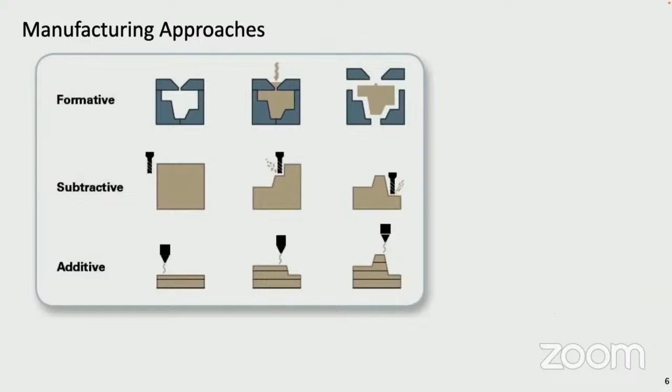We heard a bit of an introduction last night from Chad about making things, and I thought I'd put it into context regarding the 3 different ways of really making things: molding, which are formative techniques that we've been active in over the years - I'll touch on that. A lot of people make things by subtractive techniques, and then additive. I think the value of doing things by additive manufacturing is mostly related to making things at scale that cannot be made by molding.

The complexity of lattices, for example - lattices are an integral part of manufacturing buildings and bridges, but every strut of a bridge is an individual part, and to do that as one component is impossible from a manufacturing point of view. So additive really thrives in that regard. And just to say something very simple but exceedingly profound: product design depends on product manufacturing.

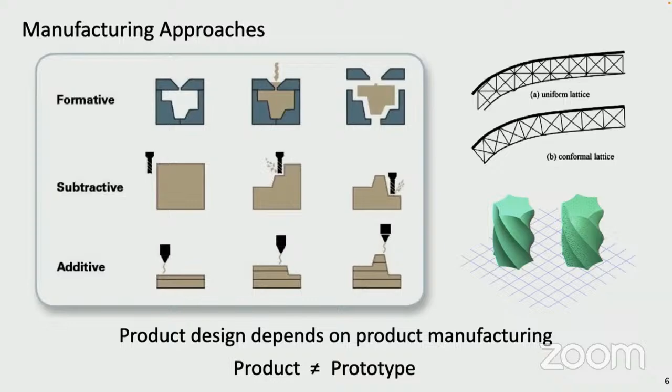You don't see things that can't be made. You do research, there's a lot of academic research, you see lots of beautiful things, but translating that into the market requires it to be makeable. This difference between a product and prototyping is really important to keep in mind. What I'm going to try to emphasize is manufacturing science and engineering, the tools that can actually scale to bring things forward, as opposed to the beautiful tools for prototyping and basic science research.

I stole a slide from Matt Becker, his perspective on polymer-based additive manufacturing, with various techniques including the extrusion techniques we see a lot of. Think about a hot melt glue gun and other extrusion kinds of approaches for deposition. Then you have jetting, binder jetting approaches with UV curing and powders, and powder sintering, which comes out of the metal-based 3D printing world. Metals being atomic solids sinter very differently than molecular solids. Polymers derive all their properties from chain entanglements, and the full evolution of chain entanglements often doesn't happen by sintering, but it's a profound technology nonetheless.

What I'm going to be talking about is the liquid-based UV curing systems, and there's been a history of those. Basically a direct write tool in a layer-by-layer approach, turning a liquid into a solid. That was the SLA technologies developed in the 1980s in Japan and then further in the United States. Then going from direct write to an XY projection, a DLP system, digital light projection systems, which dramatically improve the speed because now you're projecting an entire XY plane instead of direct write.

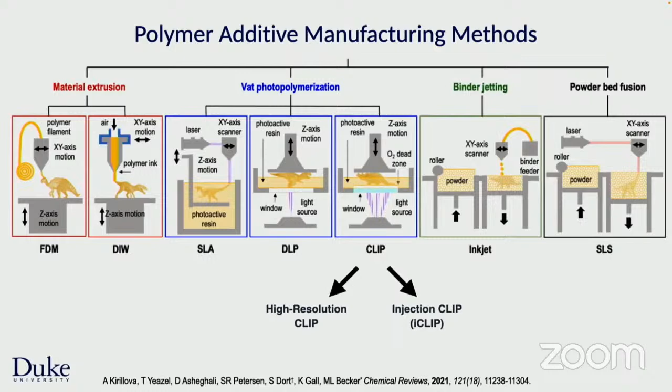About 7 years ago now, we published this paper and gave a talk at TED about a new approach for 3D printing that we refer to as continuous liquid interface production. It's basically an XY projection from a DLP projector, and we're using light at 385 nanometers. At the bottom of this reservoir is a very special window. It's not only optically transparent, but it's also permeable to oxygen.

Those of you familiar with free radical polymerization know oxygen's an inhibitor for free radical polymerizations. When you hear about polymerizing a monomer, you often degas the monomer - you're removing the oxygen so that you can kick off the polymerization. Here, we're exploiting oxygen, and we're exploiting the inhibition of the polymerization and the replenishment of oxygen caused by the depletion of oxygen with the light-induced decomposition of the photoinitiator. I'll walk through that in more detail.

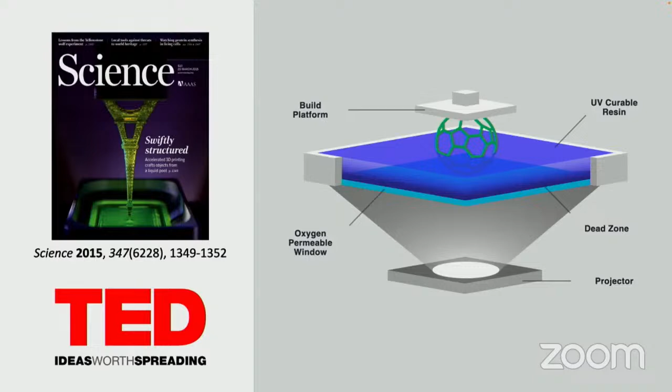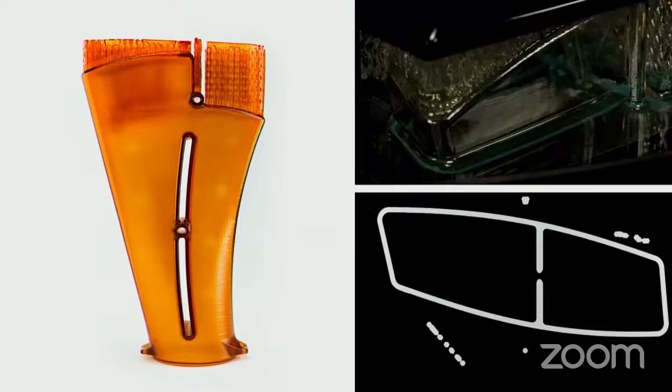What happens is you lower this platform into this liquid reservoir, you get very close to the window, let's say you get close to about 100 microns. So you have a 100 micron sandwich of UV curable resin between this stage and the window, and then you start projecting light. What happens is that light will permeate that 100 micron gap and cure the resin asymmetrically. The resin will bond to this metal platform, adhesively bond to it, but it doesn't bond to the window because of the oxygen replenishment, and there's a gap between the part and the window.

As you pull the part up, there's a suction force that draws resin in underneath it. As this platform moves - and this is an accelerated video, but this is 100 to 1,000 times faster than traditional 3D printing running in this manner - and because we're using this projection of light, we can basically make unmoldable things. This breakthrough in speed allowed 3D printing to transition significantly to a manufacturing setting.

Now, what kind of window gives you these properties? We looked at a lot of different kinds of windows. We looked at thin films. We looked at rigid windows. We looked at liquid windows back in 2014 - Chad talked about some liquid windows, we were doing that in 2014 as well. The key is that they're highly permeable to oxygen, and perfluoropolyethers and perfluoropolymers are among the most oxygen-soluble or permeable materials known.

We like rigid windows because there's a lot of forces on the growing part, and I'll walk you through those. There's a Stefan adhesion force between a solid and a window that's caused by the liquid. And so we actually like mechanically strong and durable windows to make this work well.

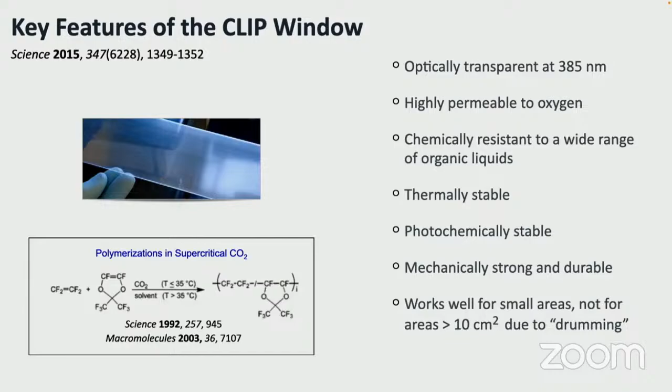So I'm going to show you something here. This is optical coherence tomography, kind of like ultrasound imaging, but uses light instead of sound waves. And you'll see the part growing. We put some particles in there as a contrast agent. But you can see this gap. This is a gap created by the oxygen. Light's coming through here, curing the resin, and you see as you lift the part up, resin's being drawn in underneath here.

This is not an adhesion issue. There's a mistake in the literature when people think about this as adhesion. This is a mass transfer issue. How do you get resin in to the deepest pixel? And that's the key to these processes. Oxygen gives you the ability to replenish liquid without going through a traditional layer-by-layer approach. So this is really a mass transfer issue.

So what's happening is, if you look at what happens, light comes in. This is a UV resin, a UV curable resin with a photoinitiator. Light comes in, it decomposes the photoinitiator, generates a radical pair. That radical pair can do one of two things. If there's oxygen present, the reaction with oxygen is far greater than it is for kicking off a polymerization. So there's a competition reaction between inhibition with oxygen and initiation of polymerization.

When light comes in, this is a concentration axis, general terminology, and this is a z-axis, so we're going from the window up into the liquid. Light's coming through the window. It's most intense as it enters the vat, and then the light intensity depletes with distance up into the liquid, just due to molar absorptivity.

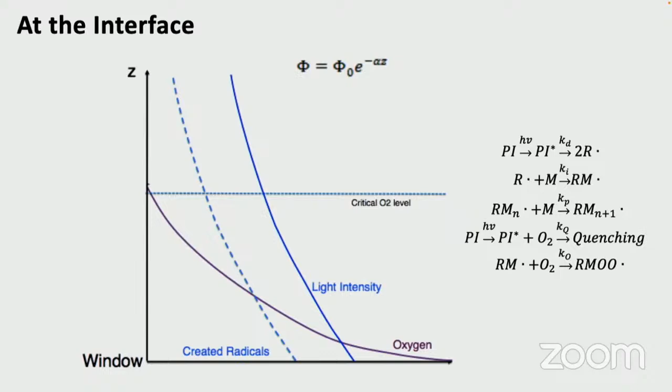That light is decomposing the photoinitiator, which generates a radical pair, so the radical concentration is highest at the window, but so is the oxygen concentration. And as that oxygen concentration gets depleted because the radicals react with oxygen, the oxygen is being replenished through the window because the window is very permeable, and underneath the window is a source of oxygen. So what happens is the oxygen concentration is dropping with time, with distance, and once it drops below a certain threshold, the polymerization will take off.

And this distance is the dead zone. That's where the rate of polymerization will take off. There's a gel effect, even a Trommsdorff effect, back to Smith-Ewart kinetics. And this distance is what we monitor.

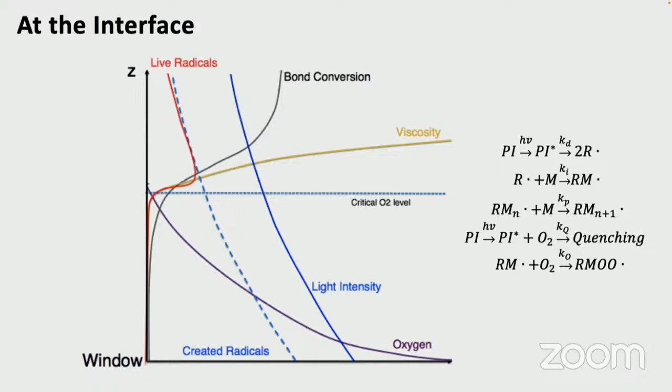There's a lot happening. There's heat evolution, oxygen consumption, viscosity issues play a really key role. There's a lot of forces on the part, so the green strength of the part as you're pulling on it, and this is just a simple geometry. I'm showing you just a cylinder, but imagine if you're making a complex lattice and the part is elastic. You can deform it and screw it up.

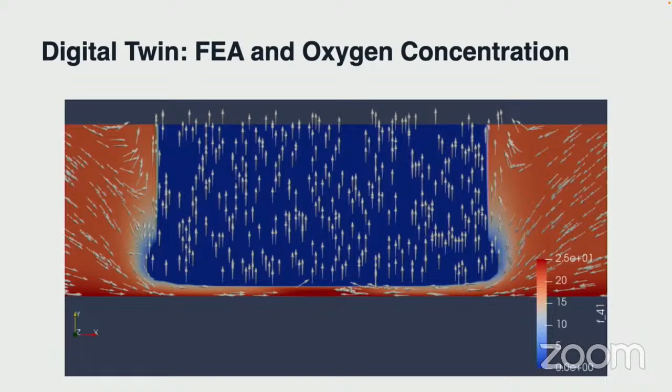So there's a lot, this is a complicated process. I think of this as a software-controlled chemical reaction to grow the parts, because we have to bring a lot of understanding to the process to even get it to work. And so we have this flow field driven underneath the forming part. There is a gradient of polymerization between the low viscosity monomer and the part, and there's a velocity flow field, and we control every step of the process.

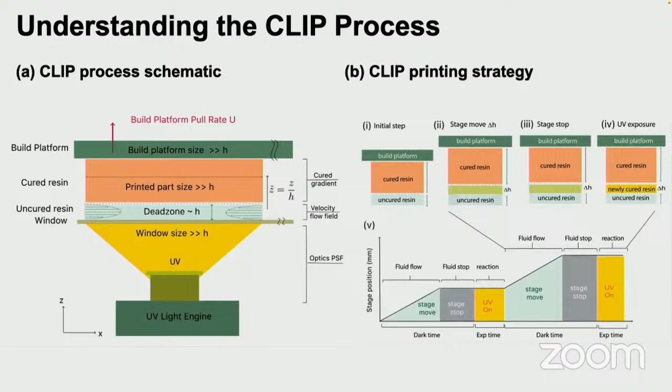The printer is designed with the principles of mechatronics, where everything is sensored up, motorized, and completely controllable. So when we elevate the stage, we can elevate it at whatever rates we want. We can pause, wait for the liquid to reach quiescence. We can photolyze an image, and then we can repeat the process. And this can happen very quickly, and we're basically playing a movie frame by frame, okay?

So we rolled this out into a company. It was a fun run leading the company.

The first person I hired, our founding VP of engineering, happened to be the founding VP of engineering at Tesla. We had over 50 former Tesla employees in the company. And we sensored up the printers, and we connected them to the internet. The reason is, in the beginning, this was hard to get to work, and our fundamental understanding, the digital twin of our process, if you will, was modest. We could screw up any print. But what happened was we could do over-the-air software upgrades. These printers were connected to the internet. We controlled the oxygen, the light, and everything.

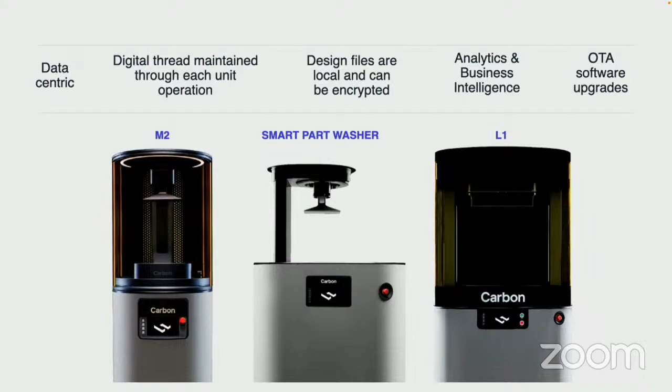And as more people used the printer, the better the printers got. That's a network effect, and it turned out to be an amazing way to roll out the business.

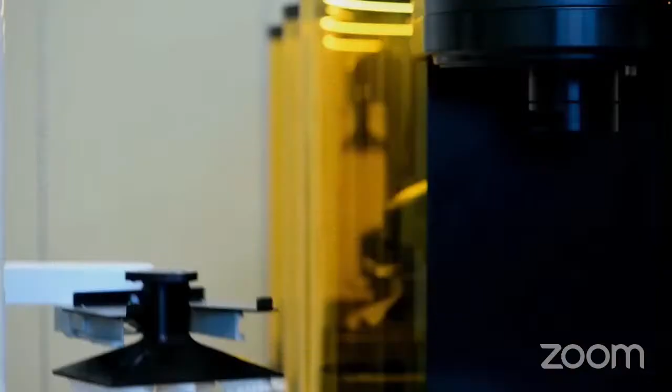We started stringing together the printers, and again, with everything connected, even the printer platform has got a near-field communication tag on it. So we're moving the platforms around these factories, and the software's tracking every element of it, so you knew which parts were on which platforms.

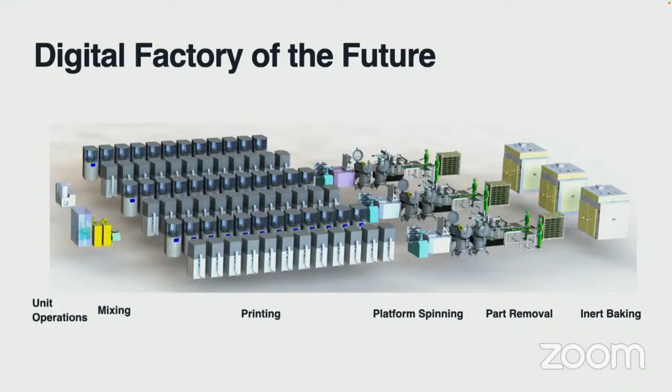We could print the parts. We can go into there's a part washer in this schematic. This is a part washer. These are parts being printed. And you can start putting together bigger and bigger factories, and even with bigger and bigger printers.

One of the things to recognize is when you start running up lots of these printers in a liquid resin, it's common to wash with solvent because there's a lot of excess resin on the parts, and you can't do that at scale. That's a waste nightmare - mixed waste, IPA, resin. So what we ended up doing is pioneering a spinning process.

And so you'll see a centrifuge designed in the Central Valley, California, like a lettuce spinner - a platform with a pair of running shoes with a lattice. These parts come out of the printer and they get spun. Excess resin gets collected at the bottom and goes back into the printer. So it's 100% atom efficient from this process.

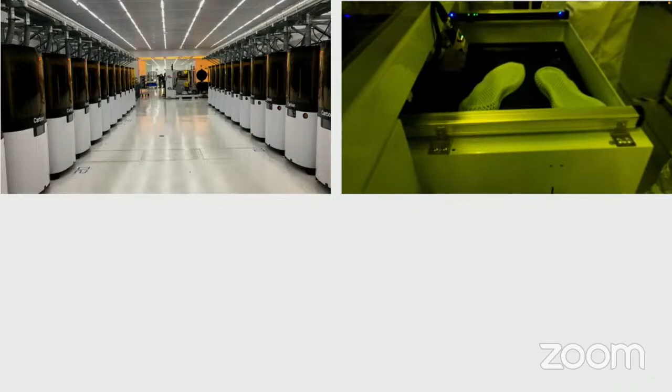And back to the digital world I'm talking about, these shoes are not only designed for performance and comfort and all those things, they're designed to be spun clean. That's what a digital co-design process looks like in the digital world, to optimize manufacturing and throughput. And then every part has got a digital code on it, a data matrix, and it's tracked throughout the factory.

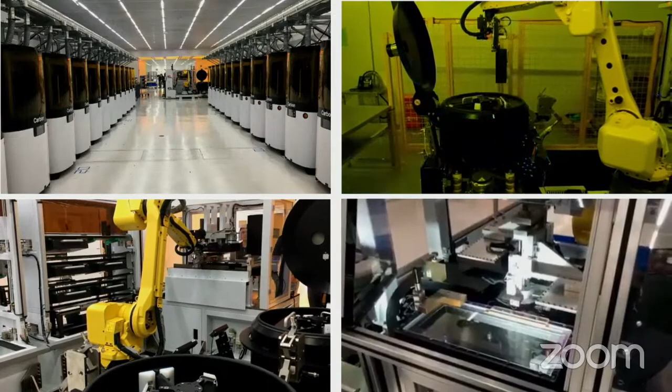So this opens up new business models. I think of every part as alive. Every part has a unique record in the cloud. We have its birth certificate. We know which printer, which resin. We know every photon that went into every layer, all documented. We have its grades in school - we have its mechanical properties. That stress strain curve gets put up into that file.

They go through use life. You can measure the properties again and populate it. You can get its death certificate and recycle. You can use this data to now quantify environmental stewardship. And this digital world opens up new business models. And this is where this is all going.

So let me pivot away from the process and talk about the resins. As a lot of you know that are in the polymer world, light is not a great way to make great polymers - they're often brittle plastics. And it doesn't matter if you got a really fast polymerization process, nobody wants lots of brittle plastic stuff. So, and I'm a polymer person, this was a key breakthrough we needed to focus on: how do you get a great set of polymer properties out of a light-based printing process?

We cheated. We broke it into two processes. Most great polymers are made by reactive resins - think about polyurethanes, polyureas, cyanate esters, epoxies. So we basically split the process into two, and we use orthogonal chemistry. You saw Carolyn Bertozzi just got the Nobel Prize for orthogonal biochemistry inside a cell. This is orthogonal chemistry in a 3D printer, right?

So we have free radical chemistry, a photoinitiator, and classic free radically polymerizable monomers - think about it as 10 to 15 volume% of a UV curable component. And then we have classic step growth polymerization components, shown here with an epoxy, a diepoxide and a diamine, with a certain pot life. We knew no one ever went into this approach because the printers were historically too slow, and these step growth chemistries would prematurely gel. We're printing 100 to 1,000 times faster. We knew we had a window of operability to combine both step growth and the UV curable systems.

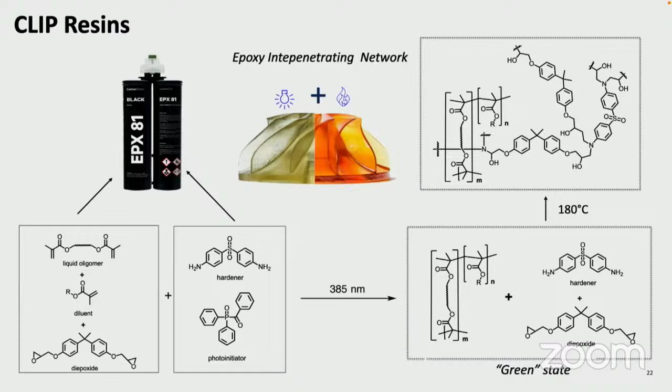And this is how this works. I showed you epoxies. I love polyurethanes. Your polyurethanes are really versatile. You can vary the soft segment, the rigid segment, the chain extender. You can get elastomers. You can get high molecular weight linear polymer that's got great ductility and impact strength. And we use these a lot in this approach.

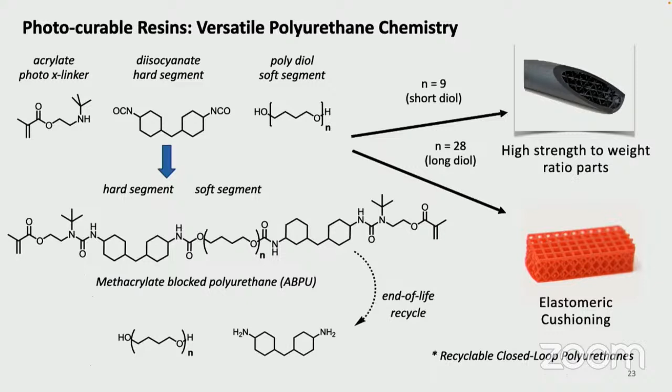In the beginning, as I mentioned, we pioneered this kind of chemistry, but we started to teach the chemical companies how to do this. And so we set up basically an app store for resins. Right now, there's over 50 different resins available. We designed about two-thirds of them and stood up a supply chain. But now the chemical companies are designing resins for this platform, and they sell them on our platform. They handle all the shipping and those details.

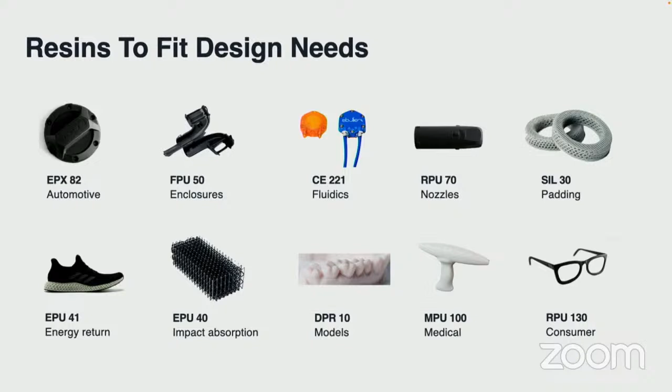It opens up new properties that we haven't gotten to yet, especially in the dental space. I'll walk through that. But we have master files at the FDA and all sorts of products with a wide range of different resins, and we're constantly developing new ones, including resins that are chemically degradable, can go back to liquids and be reused. So lots of stuff coming.

So this is now a platform approach, and it gives businesses the ability to make things. I've got a little video just to show you this.

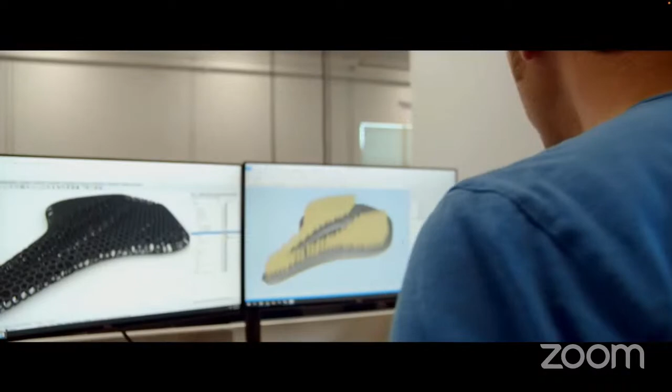We salute all those who believe good enough is never good or enough. Those who pursue excellence for themselves and for our planet. At Carbon, we apply our craft using science and technology to push limits and realize products unmatched in performance. Our difference is one you feel, and it is light years ahead of anything else out there. You feel it in running shoes that control energy with every stride. Saddles that enhance your performance and comfort mile after mile. Helmets that increase your protection every time you take the field. Clear aligners and dentures that improve oral health and give you more than a few reasons to smile. Crafted by Carbon is a promise. It stands for dedication and focus to crafting what you and our planet truly need. Ongoing creation of amazing answers to our toughest questions. We salute the leaders, dreamers, and doers who keep creation in motion, who boldly imagine a brighter future and craft it every day.

So this is an amazing business. No printer has been taken out of the field. They're all in a subscription business. They all consume lots of resins. They consume software too. And we started with, I always rank things in a hierarchy of regulatory hurdles. If you can design a running shoe and you know it works, you can scale it. Way different than the automotive industry or the healthcare industry. So we always stage things to get adoption and like that.

And these running shoes represent a unique moment in additive manufacturing. This is the highest volume 3D printed product in history. We went exclusively in the beginning with Adidas. Adidas makes 500 million pairs of shoes a year. We'll get to 10% of that. We're not there yet. But we know there are more 3D printed shoes made with Adidas than all that Under Armour sells in total, because Under Armour is not a real player relative to Nike and Adidas.

And we started moving, and we got the first 3D printed parts on new vehicles out of Detroit, on Ford Mustangs, F-150 trucks. We got parts on all sorts of electric vehicles around the world, all sorts of industrial components. And a big fraction of our business is in healthcare.

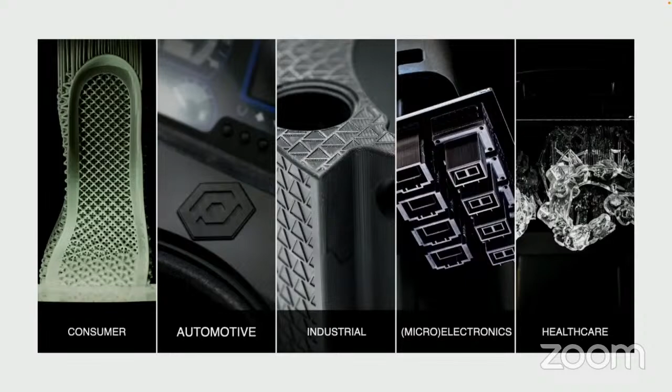Related to dental. But these products become, we think of things as a bowling alley. From a marketing tech perspective, what's the first bowling pin you're going to knock over? And then how does that cascade to additional products? These elastomer lattices, pioneered with Adidas, that are energy returning, you can make a version of it that's energy dissipative, which you want for football helmets. But the designs are similar, and some of the mechanics are similar. And so these are a wide range of products that are scaling in this manner.

But digital dentistry is an amazing field. It starts with things like Invisalign's product. Invisalign created a category. Their patents expired. They now only have about 50% of the category. We power about 70% of the others.

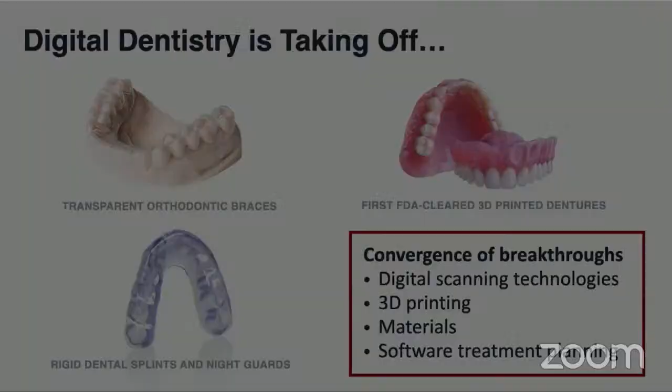But we also pioneered the world's first FDA-cleared 3D printed denture. There are 36 million Americans that have no teeth. There's over 100 million Americans that are missing a tooth. This is a huge upward mobility issue. It's hard to get a job if you don't have your teeth, speak properly, eat properly. This is significantly cheaper to go down this pathway, and it's enabled by intraoral scanning, digital, getting away from impressions. And we've got a video to show you what dentures are like.

For the last 45 years of delivering dentures or longer, there was always an unknown. When patients are looking for a denture, their biggest complaint is that they don't fit. You think of denture making as a craft, I need a craftsperson. And Carbon can do it.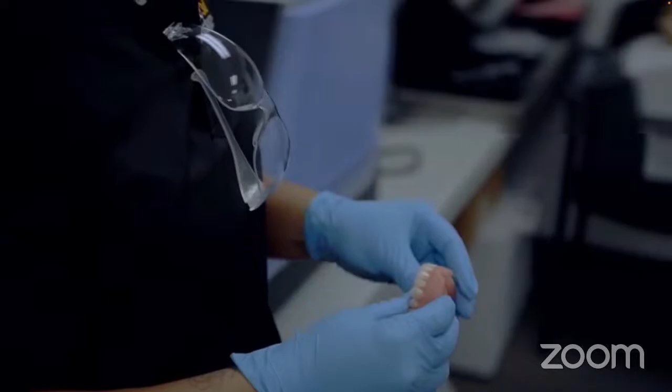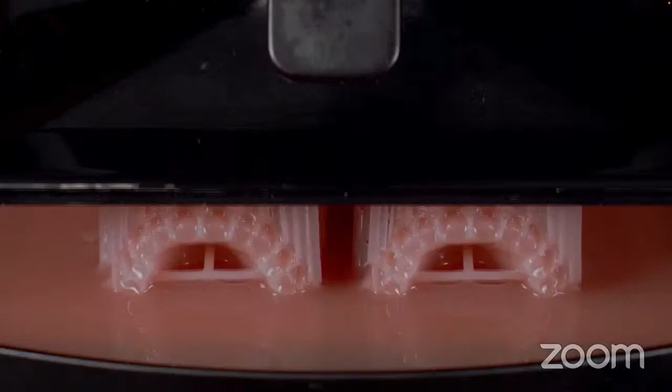Taking a lot and making it less is what a mill does. Taking nothing and making it something is what a printer does. We don't want to make molds, we don't want to make jigs, we want to make final products. And when you make final products from the milling process, it is far less economical than when you make final products from the printing process.

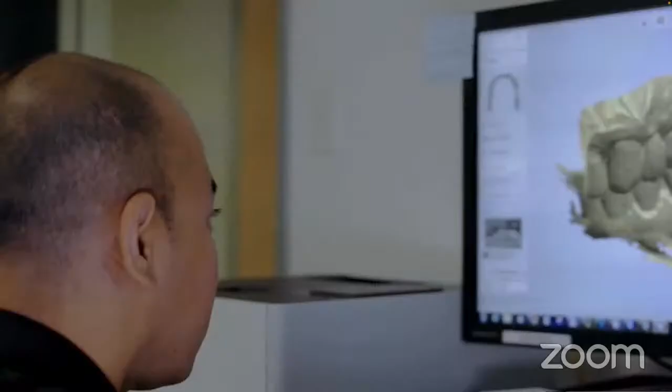There's three basic things: fit, comfort, and function. 3D printing brings all of those together. The accuracies and fit, comparably speaking to what was done even 5 years ago, has become so much higher in impact for patients and for clinicians across the country. For somebody that makes dentures day to day, it's transitional, it's transformative.

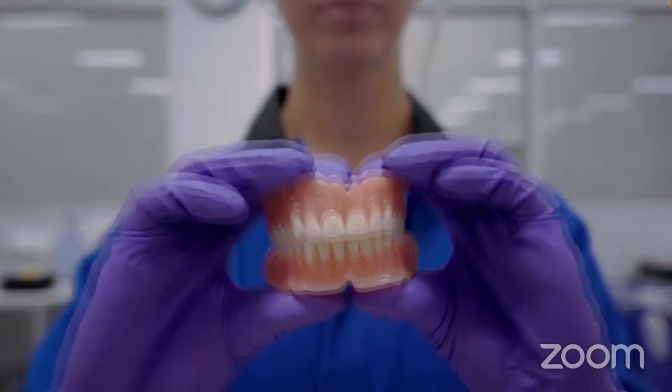A lab powered by carbon will allow me to make probably the best denture ever made. So of all the things we're doing, I'm most proud of that. And you go from 8 chairside visits for a manually prepared product to 2 chairside visits. And it's perfectly fitting because it's done with scanning.

If you lose your dentures, and I've heard so many horror stories, somebody wraps them up in a newspaper, throws them in a fireplace, dog gets them. You're back in that chair 8 more times to get another one, handcrafted. It's hard to hire handcrafting people to make them. Once you go digital, you could order a 4-pack. Doesn't matter, right? So it's transformative in that regard.

Okay, so that's history. When we look forward, what are the additional things that need to happen in this field? One, we still want the printers to go faster. We want to do multiple material printing. We want to go to high resolution. Lots of opportunities on resins that are electrically conductive, resins that are biodegradable, resins that are chemically recyclable, new kinds of properties, thermal conductivity. And then there's lots on the software side of things.

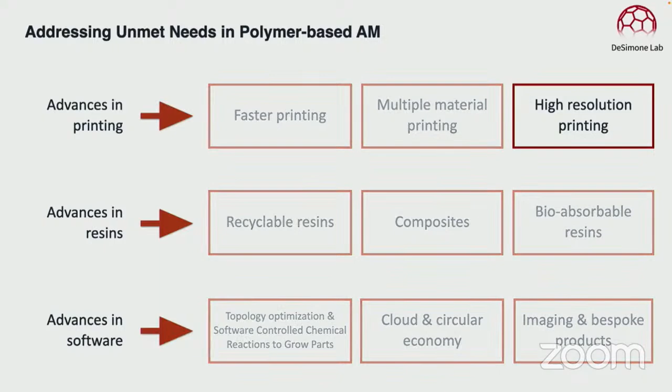We spend a lot of time on the OS, the operating system, but all sorts of scanning and design software too. Let me focus on high resolution for a second. Beautiful things happening at the small scale with direct write tools. You saw some of this in Chad's talk last night. Think about NanoScribe tools and everyone, amazing things.

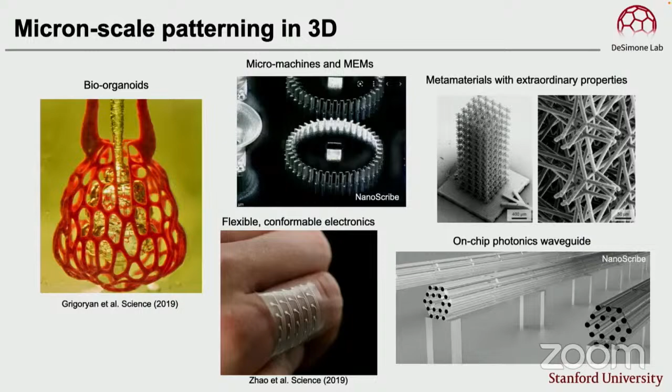You can't scale those up. They're research tools, and they have an important role in our ecosystem for doing that, but there's a lot of interest in how do you scale these things up. And so we set out to design a single-digit micron resolution printer.

So the printers I just showed you from Carbon, there's 2 classic sizes. There was a 75 micron pixel, it's the M-class printer. And there was the larger printer for the running shoes, it's a 162 micron. So we've built printers now down to 30 and now 1.5 micron resolution. And what that involved, what Kaiwen and Brian and Tim focused on, was the projection optics.

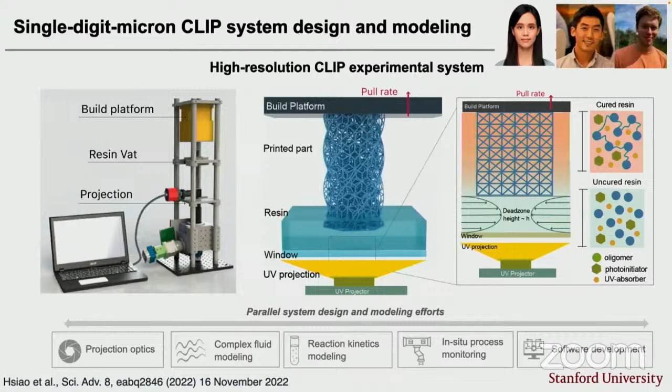Again, the fluid mechanics are very different at this length scale. The reaction kinetics, in situ process monitoring, and the software. And we like to print the Eiffel Tower. That's sort of a fun thing to do.

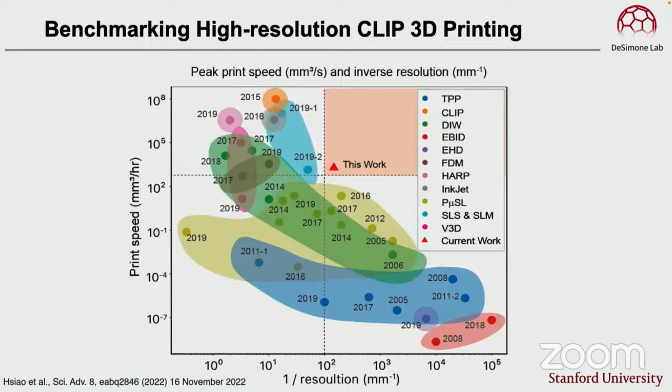The classic carbon printer, 75 micron, 30 micron resolution. We can start making these things. And then you see this little guy right there. This is done with a 1.5 micron XY projection. And you know, when you start putting this together and back to manufacturing, science, and engineering, you think about resolution and speed. Here's a lot of your direct write tools down here that drive a lot of the research industry. We want to start going into this box and have high throughput, high resolution. And that's where we're spending our time.

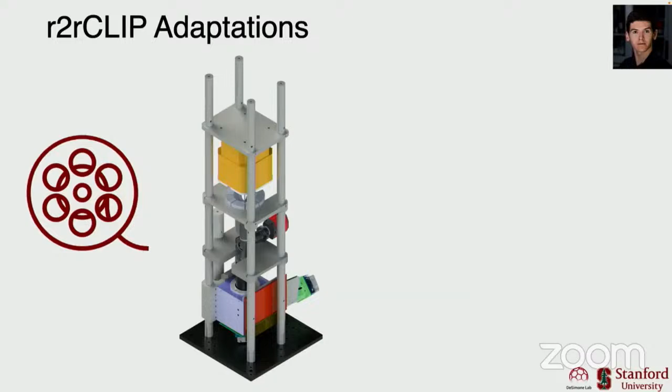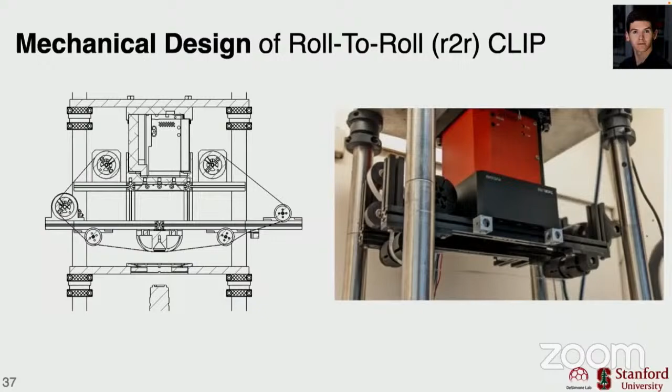Well, what are some of the things that we can do with this printer? Ali and others know, and Samir Mitragotri, we used to make particles by molding. I love particles. Now we're 3D printing particles. And when you have particles, you always have to think of a web-based process. You need the throughput. And so we have film that comes through the printer, the high-resolution printer, because it doesn't take long to print these. They're not very big. But you want to make a lot of them, so you've got to get the film going.

And these are some of our particles. This is actually looking at our particles in Heinrich Jaeger's lab at University of Chicago. He traps our particles in a sound node, so we can inspect them individually. But these are really interesting objects.

I used to mold particles. We call that particle replication in non-wetting templates, PRINT. And I talked a big game, but at the end of the day, looking back, I think we had 10 different shapes, because it was hard to get the master template, and you invested a lot in that. And because of the symmetry challenges with molding, we had modestly interesting shapes.

Where else are we interested in these? A lot of beautiful work coming out of here in microneedles. A lot of the world's chasing intradermal delivery. Why isn't intradermal delivery a thing? Well, it's been a challenge making it a reliable and repeatable dosage form.

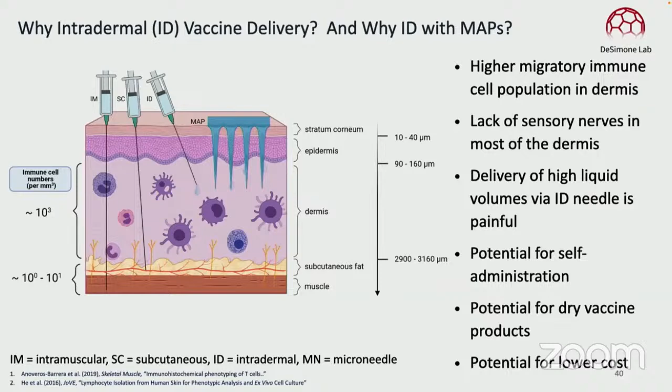In perspective, I think the evolution of the microneedle world started back in the 70s, and a lot of the technologies were etching silicon and some of the microfabrication techniques out of the microelectronics industry. Arguably, you can call that Gen 1 technology.

And then there was the molding approach. Start with a master template etched in silicon, make a mold, replicate those features with reasonable fidelity in the replication process, but that opened up the material space. But you're still limited with typically features that are all the same height, because that's what you get out of the microelectronics industry, and you have a bed of nails effect with challenges in the higher forces.

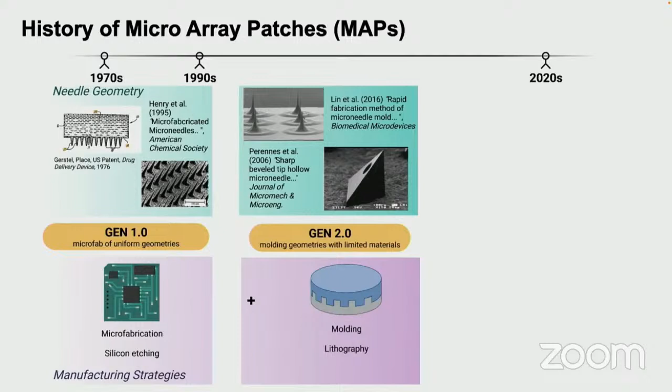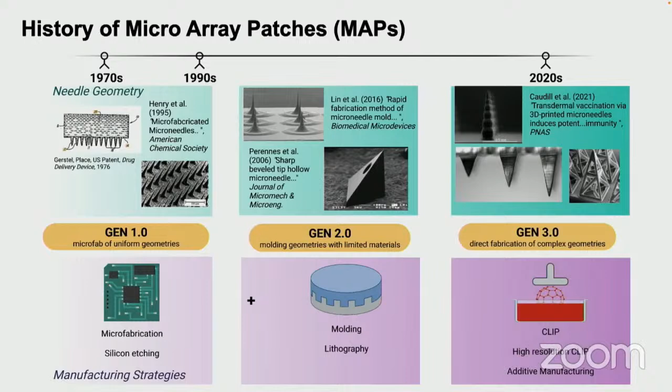You still have limited designs, and I would argue that we're now into a Gen 3 microneedle world that allows you to go to designs at scale, not just prototyping, but now at scale with designs, even simple designs of different heights, different structures that you can directly print.

So we've been at this now for a while, and finally got to the vaccine world when I moved to Stanford. But we started off with these very simple designs, arguably designs that could be molded, simple designs, maybe a little bit more surface area. This is a printer with 30 micron resolution.

And we did a free meniscus coating, dip coating of a model vaccine component, antigen and adjuvant. We separated them on different needles. And then we did a skin delivery system.

And we compared that to intramuscular injection, like a lot of people are doing. We showed that because we're taking advantage of a higher concentration of migratory immune cells in the skin, we saw a 50-fold increase in antibody response compared to an intramuscular injection. We had a different Th1, Th2 balance, T-cell, B-cell response. I won't get into those details here, but we showed that this is a valuable approach for an enhanced vaccine delivery system.

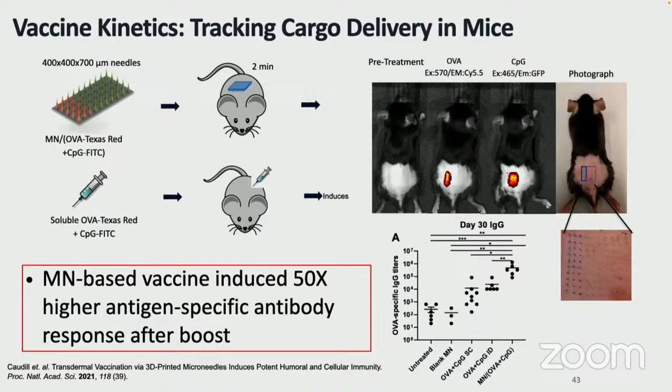The challenge is when you have a coating on a solid microneedle, especially coatings that might not be mechanically very strong. Think about a brittle sugar coating from a lyophilized-like product—the analogy I use with the group is a 2-day-old glazed donut. The sugar falls off. If that sugar is on the cone and you're pushing into the skin, it can slough off as you're inserting it, leading to lack of reproducibility and reliability.

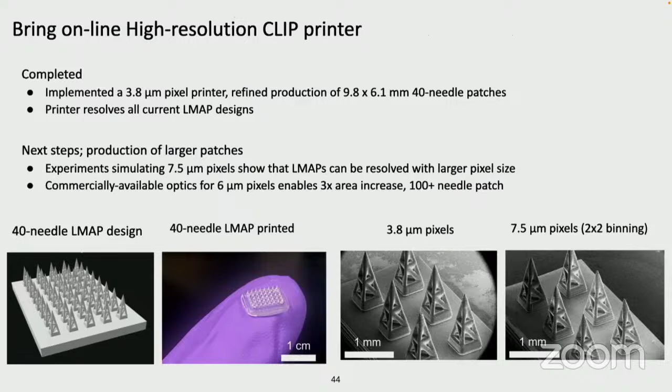So now with a higher resolution printer, we can advance these designs to ones that arguably haven't been seen before, taking advantage of a mesoscale structure within the needles. With a 3.8 micron pixel, and doubling the pixel size, we found what was an optimal size for us, and we've been making a lot of different designs. Now we have the value of a light-based process where the innovation engine is ramped up, because kids can design something in the morning and print it out in the afternoon—it just opens up the design space.

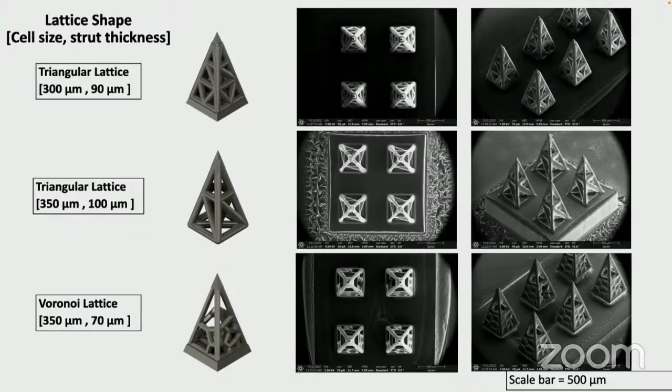We're really interested in having this innovation capability to make microneedles a reliable and repeatable dosage form. Now what's cool about these lattices is they're really great at trapping droplets of liquid through interfacial tension. You can control the surface energy of the lattice to trap a drop of liquid, and then deliver that liquid to the skin.

So we've been taking the Moderna and Pfizer vaccines and doing a local delivery without changing the formulation at all—just a different delivery mechanism.

But we also like to lyophilize the products. Lyophilized products in a dry state—lipid nanoparticle mRNA vaccines at room temperature in solid form—have been shown in the literature, not by us but in the literature, to be room temperature stable for 3 months and 6 months stable at 4 degrees. So it can dramatically change the supply chain.

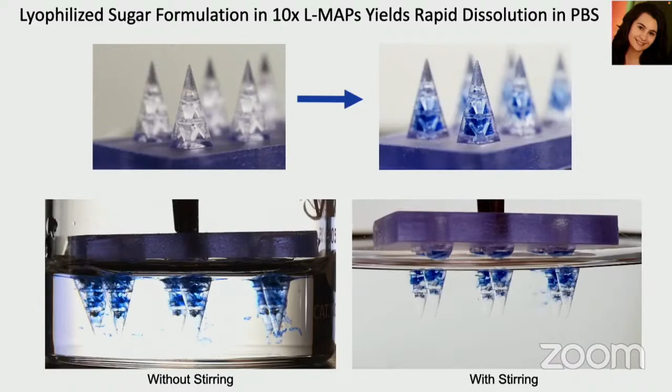The idea is that you could have a dry product inserted into the skin and have your own interstitial fluid reconstitute the product. That's the goal—to be able to ship dry products that are more shelf stable for the vaccine world.

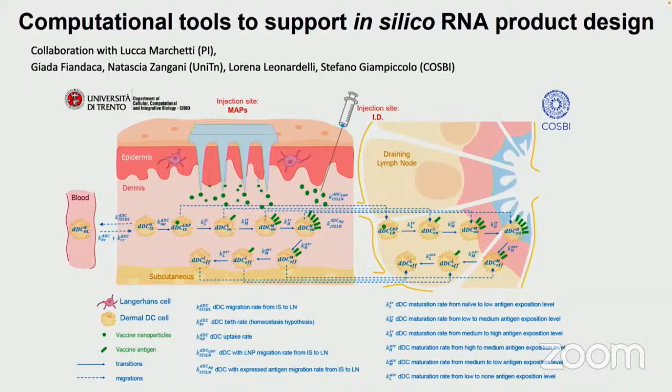Well why is that? It looks like we're delivering the same dose, but spreading it out over a larger area. There's some really interesting vaccine kinetics we're looking into—think about, do you want to give 2 immune cells 100 nanoparticles, or do you want to give 50 immune cells 2 nanoparticles? Because you can saturate out the protein expression. And it looks like we're in this regime where we're starting to quantify better performance, even over intradermal injection.

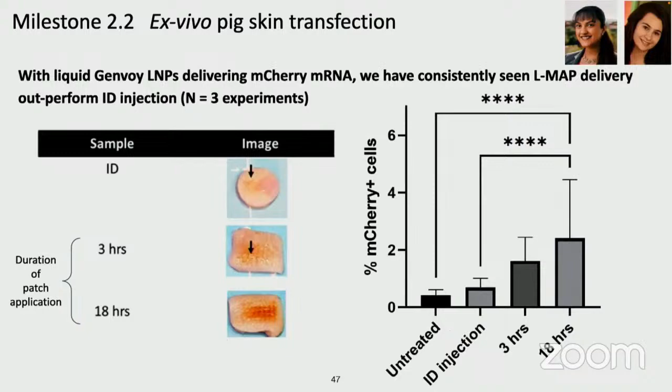Because we're giving access to these migratory immune cells. So we're going from excised pig skin, then the team traveled to Iowa, and we inoculated 70 different pigs, and we're ramping up—so the story is being told.

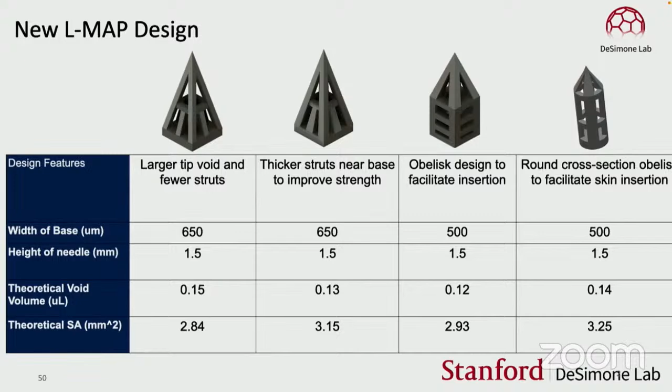And we got all sorts of new designs. We're looking at different ways of delivering and different components, and we're trying to establish a nomenclature. I'm not sure where we're at yet, but this is where we're going.

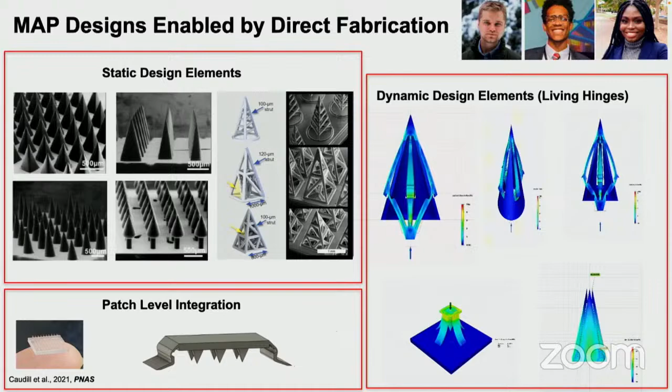We can also bring in advanced materials with capabilities of deformation, like a living hinge. So we've got all sorts of new products coming out, new designs, where we have moving parts in the microneedle world. So stay tuned for this. Again, these are things you can't imagine if you didn't have this capability for making things. Hold that thought, I'm going to come back to that.

Let me tell you about a new type of 3D printing we call injection CLIP. So CLIP, as everything I told you about, is a mass transfer limited process—you've got to get liquid into the gap. It's not a reaction rate limited process. There's no heat dissipation challenges. This is still a mass transfer limited process in all the SLA technologies.

So how do we get this closer to a reaction rate limited process? Well, we've got to get more resin into the gap. We're limited by resin coming in underneath that part, all coming from the periphery of the part. Well, what if...

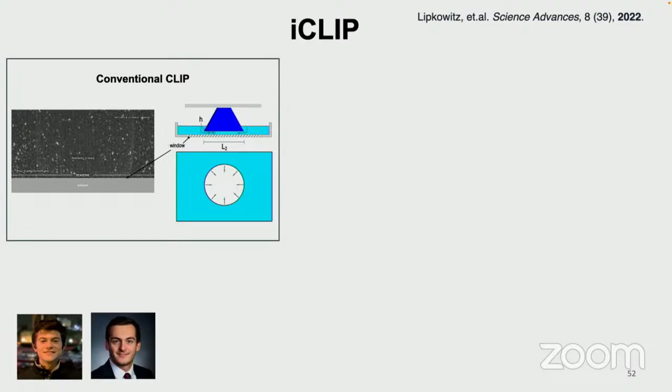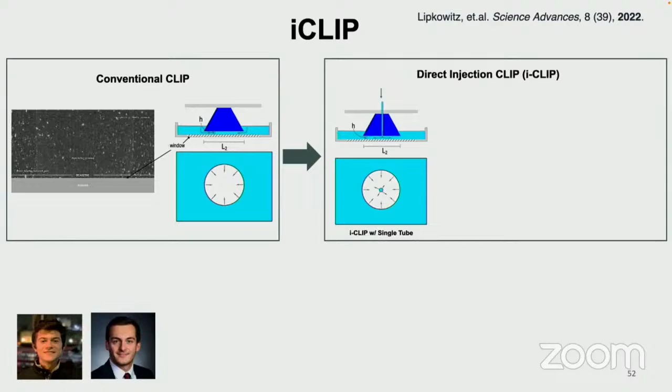...we were able to mechanically inject resin into the gap, not using suction forces, but now have a dynamically created microfluidic channel in a part that was fluidically connected to a port in the platform with mechanical injection of resin. Now you can blow resin into that gap as fast as you want. And you can imagine the design software for what the channels could look like.

And you can also imagine multiple resins. We call this injection CLIP. This should get us another order of magnitude or more in enhanced speed. It should open up higher viscosity resins, composites, and multi-material printing.

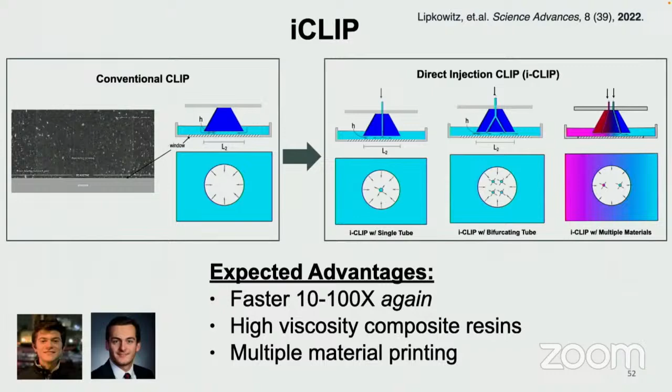We just published on this, working with Eric Shaqfeh to understand all the details in the fluid mechanics. What's fun is you can basically toggle a gradient between CLIP and injection CLIP. Imagine building a part where you fed 20% of the resin via the channel and 80% was drawn in from the periphery, or you fed all the resin via the channel. So you can run this process.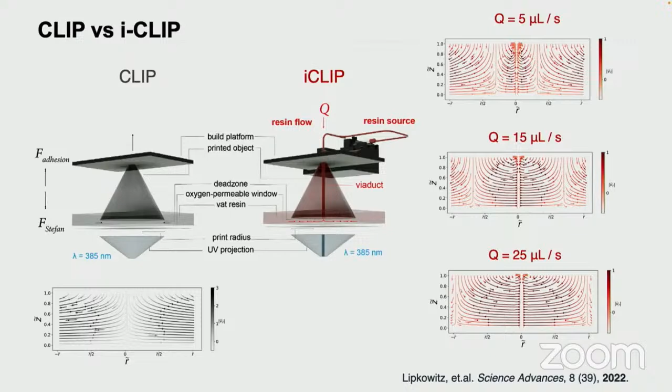Here's an example where all the resin needed for the part is coming through that central port. And here is where we're delivering just a fraction of the resin through the central port, with some coming from the periphery. You get a stagnation zone underneath the part, which has some really beautiful fluid mechanics at the interface, and you can toggle through that.

But the most important thing about this process is the Stefan adhesion force. If you have two plates of glass with a drop of water between them, it's hard to pull the glass apart, but easy to slide them. We're basically pulling in the Z direction two solid surfaces with liquid between them. That's what draws the liquid in.

There's a lot of force on the part, so much so that you have to balance it with the simple work of adhesion of the part glued to the platform. If the adhesion between the part and the window caused by that liquid gap exceeds the work of adhesion in that area, the part can fall off the platform - a failure mode. Depending on the width of the part, that adhesion force is higher.

So here's where the diameter is very high. You pull the platform up - we put a load cell on the platform to measure the forces. You pull the platform up, you stop, and you wait for the liquid to fill into the gap, and there's a stress relaxation that takes place. Depending on the diameter of the part, as the diameter goes down, the forces are lower.

But look what happens with injection CLIP - those forces can go away. In fact, you can get a negative force. This is like walking up to a wall with a fire hose - you're getting pushed back the other way. And so the forces go away.

Well, why does that matter? In 3D printing, it's often needed to put supports on parts to hold the part onto the platform, right? Now you can do things where you don't need those supports. Now, if you have islands, you'll still need a support, depending on the design.

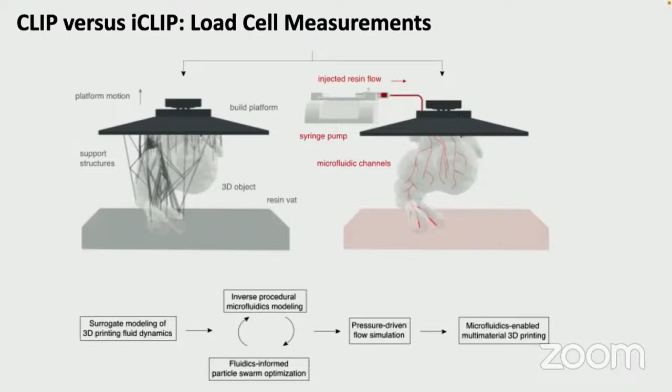And you can imagine that channels can get increasingly interesting, and you can start feeding multiple resins. We started working on this before the war broke out in Russia and Ukraine. We chose iconic buildings and wanted to keep with 3 colors - it's the same resin, just different colors. I'm from Philly, so you're always going to see something from Philly, whether it's Rocky Balboa or Independence Hall.

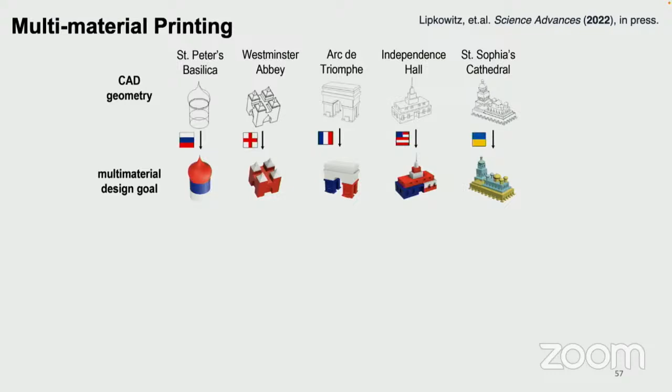Paris, London, and St. Peter's Basilica. And when the war broke out, we added St. Sophia's Cathedral, but it changed our color scheme. Nonetheless, it was easy to do. We built out the schematics for doing multi-material printing, and now we're feeding different resins using this approach. I love this image, okay.

But let me tell you what I think the killer app here is. I always think about what are the killer apps. The killer app here is actually the channel itself.

One of the biggest problems with SLA 3D printing is something called overcuring. I talked a lot about controlling the pixel size, but that was in the XY plane. The problem is the light - if you print this gap and go to print the next layer, the light never stays only in the layer you want. That's where you load it up with dye to try to make it opaque, which means you have to put more light in. It becomes all sorts of problems.

But making negative spaces in light-based 3D printing is an intrinsic challenge because of light, because there's resin here. It gets stuck in there and you overcure it. It accumulates light and will cure over time. And it's not just simple penetration, but there's light scattering coming into this space. There's light piping happening, depending on the design. It's complicated.

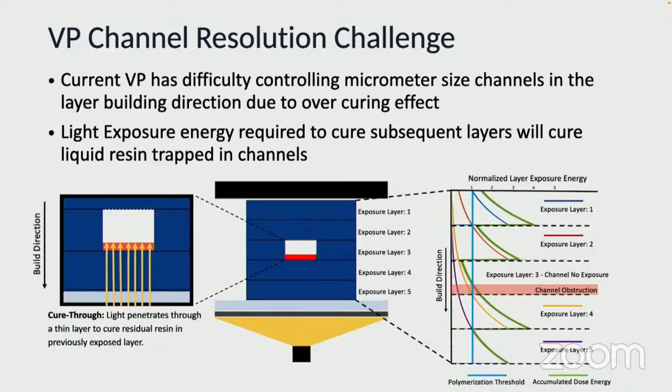Well, the resin that's coming through the channel is fully oxygenated resin. And you can feed way more than you need, and you can keep that channel open because it's not curing.

Just to prove the point, we have some of these fundamental unit operations from the microfluidic space. Microfluidics, as you all know, is a layer-by-layer approach. All the channels are rectilinear because you're projecting light in X, Y, and doing things vertically in Z. It's very hard to get a circular cross-section in a microfluidic channel, which biology is circular. But the method of making has always been limited.

So we vary these different channels. In a vertical channel, there's no overcuring because you're just making a vertical channel. But when you start varying the angle, this is where the overcuring can take place, and we're going to increasingly challenge overcuring, including a horizontal channel. With traditional clip, we see through our modeling that these will cure, and if you look at a clip-printed channel, we can make the vertical one, but we can't even make these others because of overcuring.

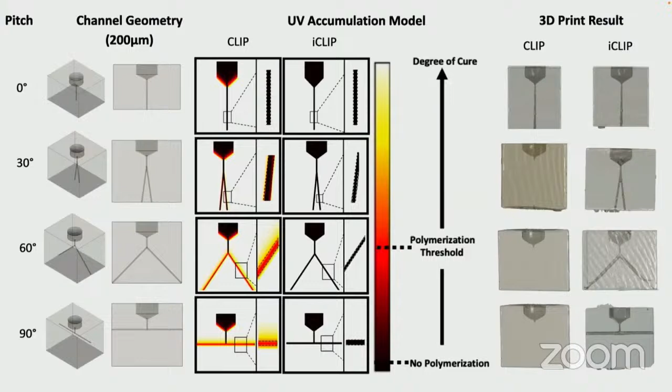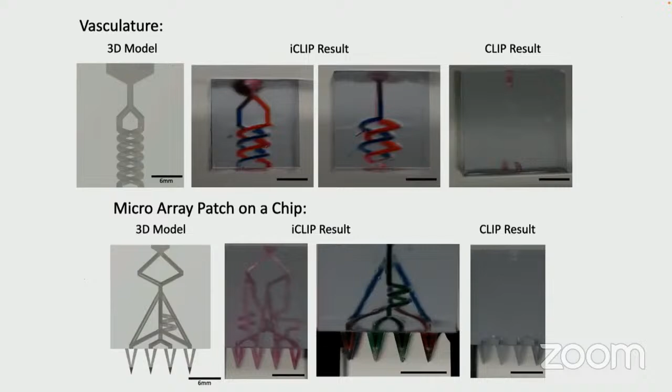But with iClip, we can keep these open. We can make negative spaces with this approach, and this is getting a lot of fun now. It's trivial. You design something in the morning, you print it out. We're having a lot of fun integrating all sorts of different designs that are unmakeable with clip. We're making microneedles with plumbing because we can, and it's getting really sophisticated, the kinds of designs that are opening up with this approach.

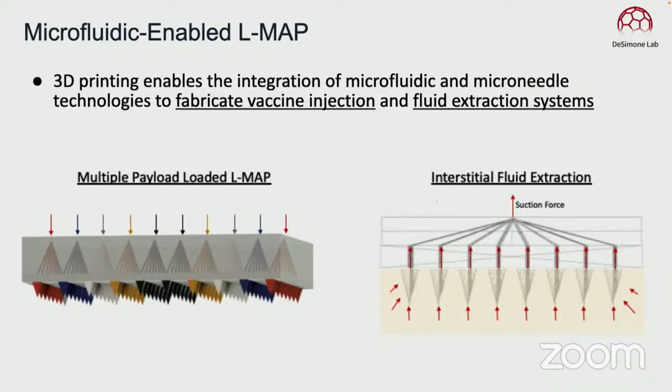This idea that we could be extracting interstitial fluid, we could be delivering things, we could be delivering multiple products - really think this is opening up this space because of this iClip advantage. So let me just do, sort of like a quad chart for DARPA or ARPA-H, to be more specific.

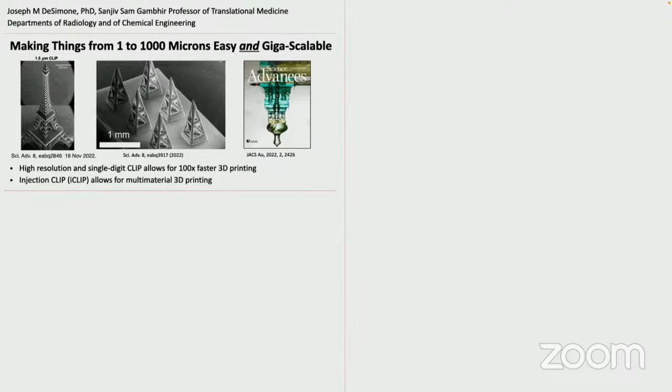This idea of we want to make 1 to 1,000 microns easily and at giga scale. Back of the envelope, 500 printers in a room like this can make 100 million products in 3 months easily. And this idea that if you could do that and open up this space of arrays, microneedles, microfluidics really opens up and can open up new markets.

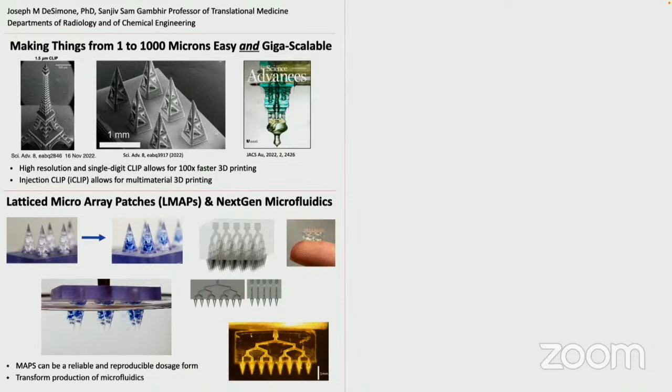Phlebotomy - I'm going to get a little pithy. What if Theranos had it right? Now, you don't say that too much, you got to be careful. Except for the fraud - put that aside. It's hard to put that aside. But they went after the wrong circulation system.

They went after blood, and the opportunity - beautiful, a lot of people here work this space - we really want to use these tools to revolutionize how people access ISF. Working closely with my colleague Tom Soh with DNA optical biosensors, integrating those into these systems to go well beyond what you see with continuous glucose monitoring. And then clearly vaccine and drug delivery in this space.

So that's how we're thinking about the future of this. Other things - where else is negative space useful? Columns, separation columns - negative spaces at this length scale. And you know, how do people make negative spaces? Well, they pack solid stuff in columns and make negative spaces.

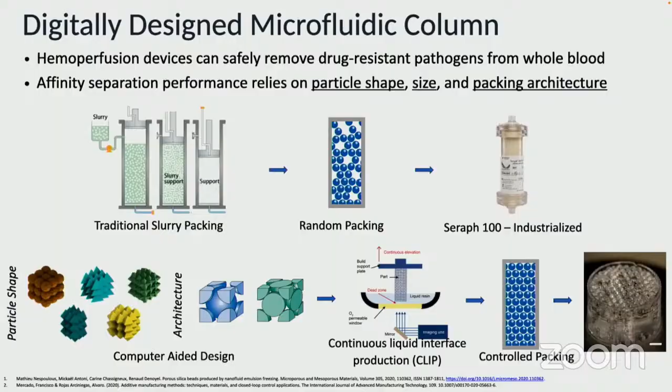We want to make these digital separations, inspired by Buddy Ratner's work. Negative spaces - how do you do negative spaces at 40 microns? It's hard to do, right? We think we can keep - so iCLIP and high resolution CLIP give us all three Cartesian coordinates, X, Y, and Z, and it opens up these kinds of ideas.

So let me stop there.

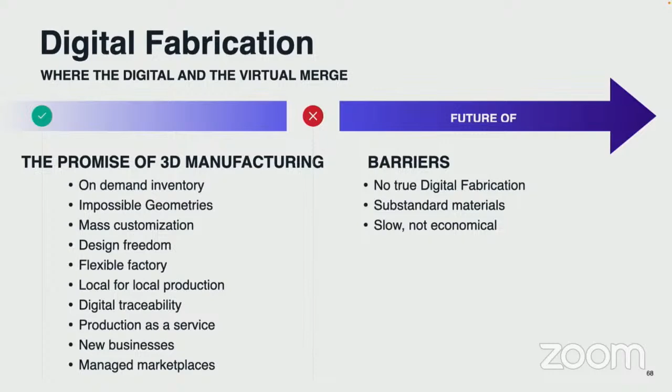Big believer in digital fabrication. A lot of people have been talking about this, Industry 4.0 and all sorts of things, but the barrier has been: how do you scale things digitally? And having tools that can scale and compete with traditional manufacturing methods - if you can do that, the unmakeable isn't, and you can have end-use parts and end-use resins economically, we really think there's a bright future.

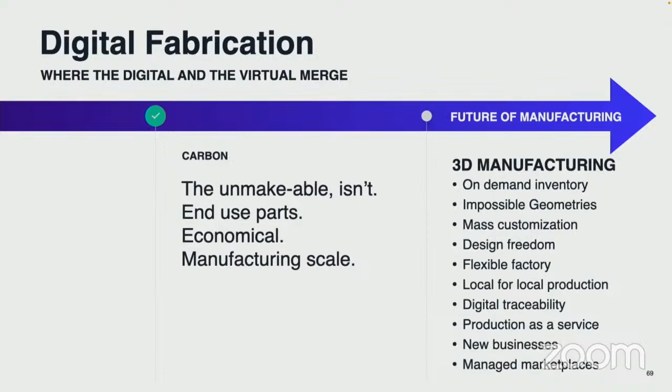And then you think about a warehouse in the cloud and on-demand manufacturing, avoiding opening up local for local production, all sorts of stuff. So with that, let me end and thank you for the invitation, and really glad to be with you this morning.

I'm always blown away by your work, Joe. It's absolutely amazing. Thanks, Art. You answered my question about how to clean parts from monomers, from the liquid. I think mostly it gets clean that way. My question has to do with your orthogonal reactions, say a urethane and a vinylic compound.

That sounds a lot like interpenetrating polymer networks. And I'm wondering if you keep them separating in phases other than the IPN in order to get your final design of your products.

Thanks, Art. It's a rich opportunity of study and analysis, and unfortunately we haven't done much yet. Between the electron microscopy and the thermal analysis and dynamic mechanical thermal analysis, we just haven't done a whole lot. I'm sure there's a rich morphology in there that we can clearly see, and how that changes with the process parameters and the 3D printing parameters and fillers - it's just a bandwidth issue. But we'd love to get some of these parts in the hands of others who want to do more things in that space, because it's really easy to make these.